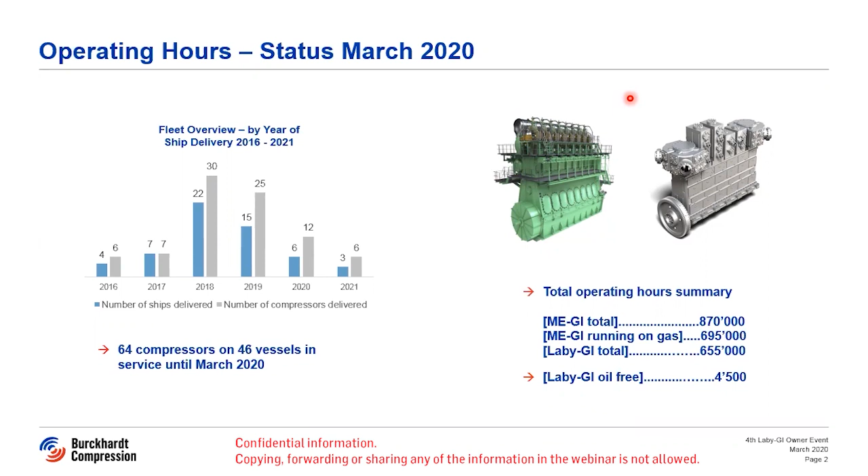ME-GI total running hours, as we forecasted, is 870,000, with almost 700,000 hours running on gas, where our Laby-GIs have shared 650,000 operating hours. And we are proud to announce that we have up to now 4,500 operating hours on the 1.5 LP250 running with the dry running sealing technology, oil-free. There will be more information in this presentation about that, and then later on by Laby-GI.

The table shows how many hours are accumulated per machine. It's very clear that the 5 LP250 single units are still the leading machines when it comes to running hours. There we have completed 6 two-and-a-half year inspections. All of those compressors have about 20,000 plus running hours, and I would say this will be a topic for the next event to share a little bit more insights of what we found when we did these two-and-a-half year services.

Nevertheless, also the other systems are ramping up hours, and there are more and more of these redundant LP190 and LP250 units now in service by end of March.

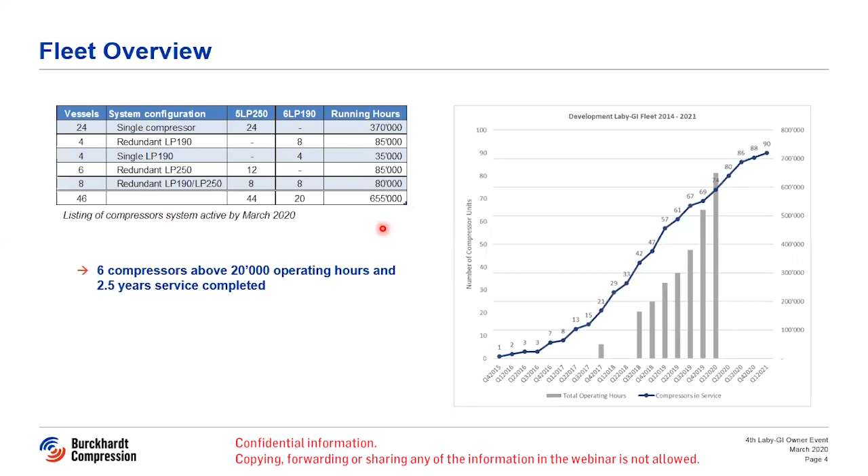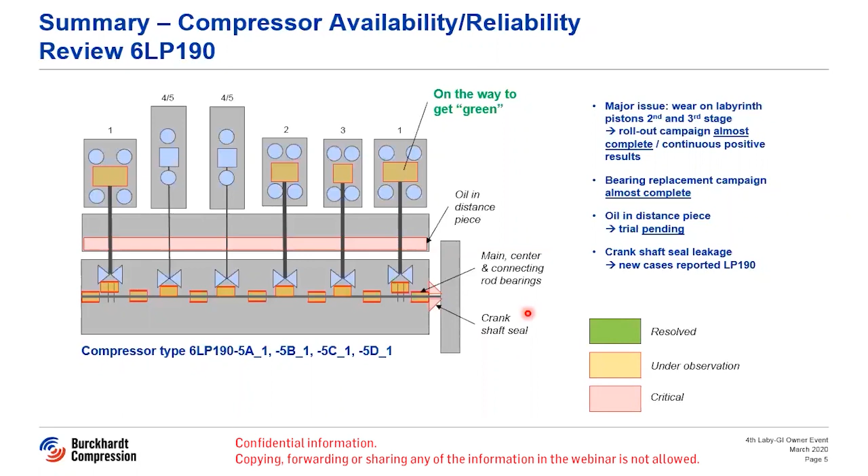However, we still keep an eye on the developments around oil in the distance piece. We still have to monitor the development of the new bearing materials, the galvanic materials, and the WM38 material, which is newly installed on the compressors. And unfortunately, we now also have cases reported from the LP190s with leaking crankshaft seals. This is an issue which has followed us on the LP250 for quite some time, and now it turns out we have a similar experience, unfortunately, with the LP190.

Reviewing the status of the upgrade campaign for the enlarged piston rod on the 6LP190, we are almost complete. At the moment only 4 compressor units remain which have to be upgraded, on 2 sailing vessels. It was planned that this upgrade would happen within the next few weeks.

But unfortunately, as you can imagine, due to the corona pandemic we have to postpone that, I would say to an unknown time, because at the moment it's not possible to get crews on board. It's already very difficult to manage logistics so that parts arrive at agents. So we have to shift that a bit, but positively said, there are only 4 units remaining out of these 25 compressors which had to be rebuilt. That is positive, we almost achieved the goal, and let's stay positive that it's just a matter of time until these 4 remaining units will be upgraded as well.

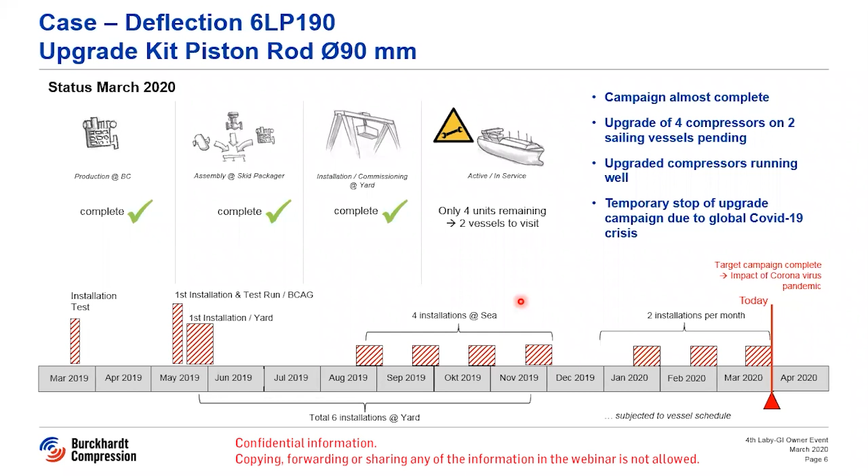Summarizing present service experience with the LP190: 12 compressors are now in operation with the D90 piston rod. The remaining compressors are still sitting at the yard waiting for commissioning.

Generally, the feedback we get from these machines is that they are running well. So far we get mainly positive feedback. It's good to hear that we get confirmed performance for the types 6LP190-5D and 5C, which have been intensively tested during gas trials at the yard.

Testing meant performance measurement where we compared required mass flow to actual measured mass flow and shaft power consumption, and it was positive for the specified operating cases. So with the measures taken, we can confirm that we are back on track with this compressor also when it comes to performance.

It's clear that we keep further development of any wear on the piston skirts and cylinder bores under observation, same with the main, center and connecting rod bearings. We agreed it should be monitored for at least 8,000 operating hours until we can give a green light that this upgrade campaign was finally successful.

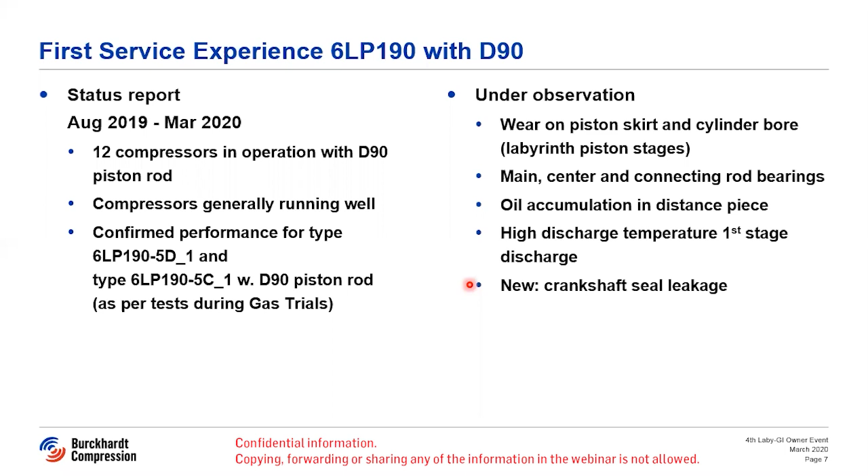The story behind this customer information is that we will have visual inspections carried out on this compressor after 1,000, 4,000 and 8,000 operating hours after the upgrade took place. We will inspect bearing conditions, distance piece conditions, crank gear conditions, and do a detailed clearance measurement on the labyrinth piston stages to get an idea of the status of the machine after the upgrade.

This was announced a bit too early in November because we realized there is a lack of spare parts, mainly gaskets, on board the concerned vessels. So now we will be ready: the parts are available, ship support will contact you, deliver these parts, and then you could start with this inspection campaign.

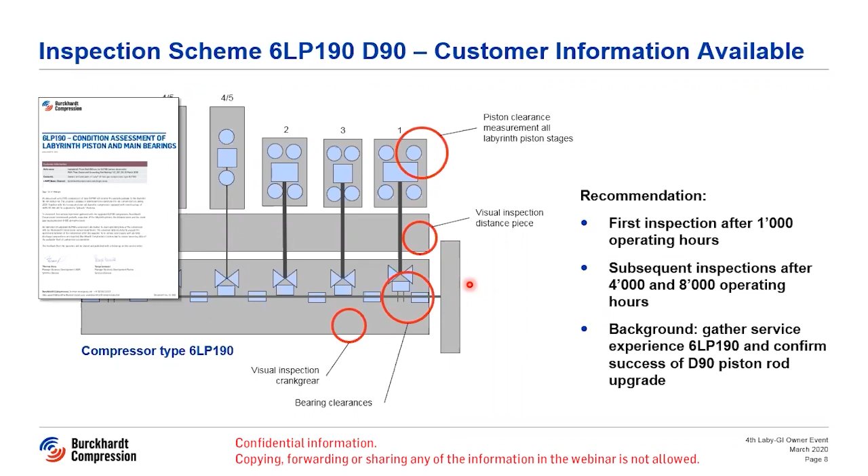A story which has been following us now for almost a year is the root cause analysis for the repeated bearing failures of compressor L0173.

This compressor, in the meantime, was tested about 22 times on our in-house test bed here in Winterthur. It was removed from the specific customer project and is now currently only acting as a test compressor. Many of the owners have been involved in the test runs done during the past month, and all classes have been involved, because we wanted to track down the root cause and make sure there is no correlation with compressors out in service.

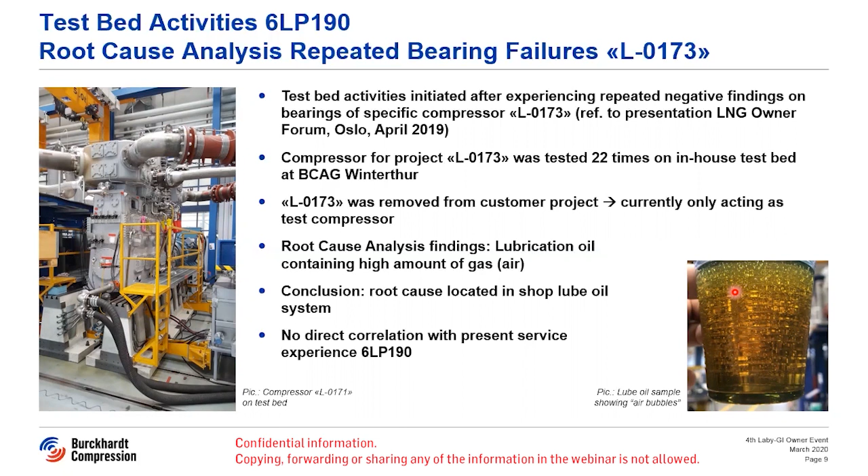So we figured out that the root cause is poor lubrication caused by entrainment of air in the shop lube oil system. Therefore, at the moment, we can rule out any direct correlation with present service experience on the 6LP190 compressors installed on ships in service. How did we conclude on that?

After first indications were present that there might be issues with the lubricating system, the shop lube oil system was modified, and some stilling tanks or stilling basins were installed. Here you can see in tank number 1, this is the oil coming out of the compressor during the test run, and I always say it looks like a fresh drafted pint of Guinness.

It definitely shows a lot of air being entrained in the oil. We can compare it to the condition of the oil in tank number 2, when it is already degassed. That led to the conclusion that the issue is not on the mechanical side of the compressor, but most likely the shop lube oil system having too many air bubbles in the oil, causing cavitation in the bearing area and leading to the experienced damages.

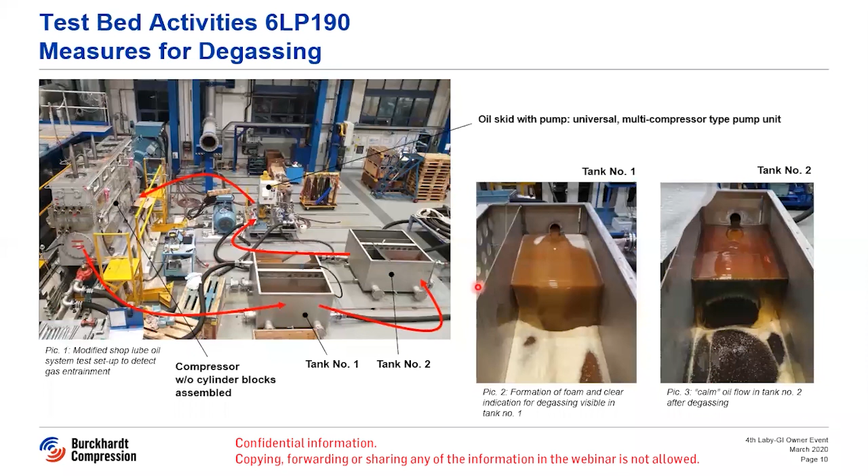How did it work when degassing measures took place? The system was modified so that this entrainment stops. On the left side you can see the typical result of a shop test with the original system, where we always had breakouts on the bearing edges as well as a lot of scratches. We did the same test run with a modified shop lube oil system, and the result was bearings coming out in perfect condition.

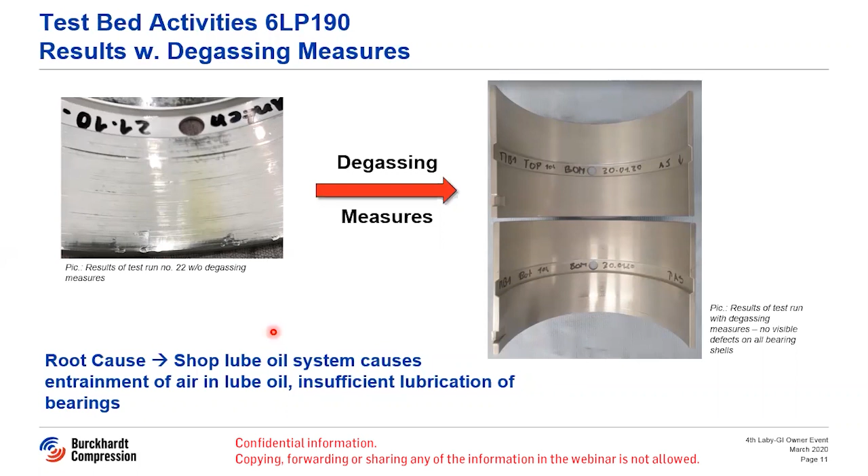So we closed this analysis here, at least in Winterthur, defining the shop lube oil system as the root cause. However, the question came up: how is the actual situation on board the vessel?

A number of test runs were conducted, and the finding was that with the actual project-specific lube oil system, we do not have issues with larger amounts of air or gas bubbles entrained in the system. Accordingly, the result of the test run was positive.

Maybe now someone might ask: why did this specifically happen to this compressor? Burckhardt has in the meantime delivered many of the 6LP 190 compressors, so why did it only happen on that one, not on others? This is a good question, and the answer is very simple.

Most of our 6LP 190 compressors have almost exclusively been tested in Korea, where we have a different shop lube oil system. The test bed in Winterthur is rather new, and L173 is just the second machine passing this test bed. That's why these bearing incidents did not come up earlier and were only stuck to this compressor.

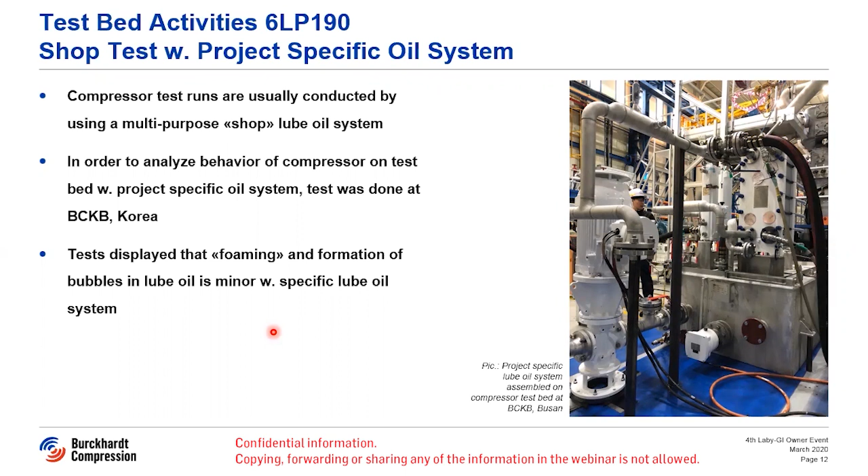Service experience LP250. Here we are still following up the trial with the new SIGRAFLEX gaskets on the valve covers to stop the gas leakages. There will be a detailed slide later on.

Oil in the distance piece is also an issue on the LP250. A slide will follow later.

Unfortunately, crankshaft seal, same as LP190, we have new cases reported. I think all the owners are now aware of this issue, and I hope we have a technical solution for that very soon. There is also a number of issues reported with axial bearings, which had to be replaced during the 2.5-year services. Usually this part should show a longer expected lifetime than just these 2.5 years, so this is also under investigation.

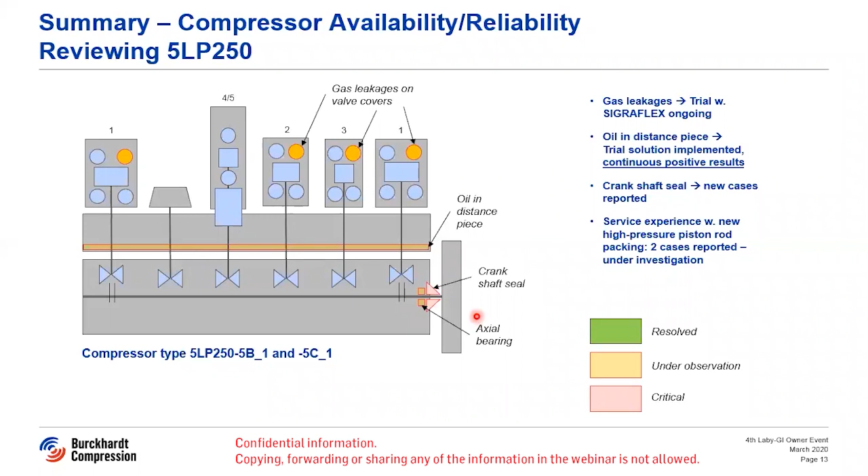You might remember the upgrade campaign on the high pressure piston rod packing for the LP250, started back in September 2018. I would say I will stop showing slides on this issue going forward, because now there are only 5 of a total of 34 compressors remaining where the old packing is still installed.

Some of these compressors will go to the 2.5-year service very soon, within the next few months, so it is obvious that this packing will also be replaced. For the remaining machine, I stopped tracking because the packing is on board — it's just a matter of time until, during a planned stop, we can replace this. So I would say we can close the chapter of this upgrade campaign, keeping in mind that almost all compressors now are equipped with these packings.

The new packing is installed on the majority of systems now and has accumulated quite significant running hours. For the time being, we can report that we have faced 2 issues with the new design of the piston rod packing. At least one time, we consider it to be a secondary harm coming from the outside — we found some metallic particles in the compression chamber, and they entered the packing, leading to excessive wear.

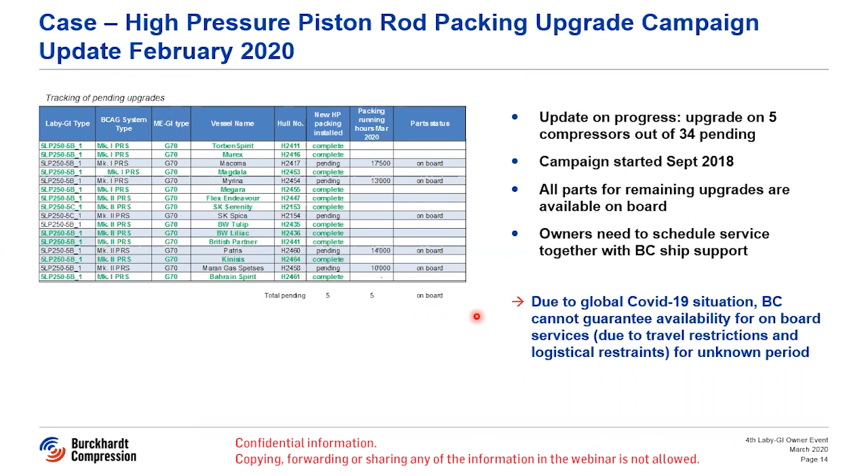Oil accumulation in distance piece, an update here. It should be March 2020, not August 2019 - sorry, that's a typo, old slide.

We have already announced that we have positive experience with a setup running on the non-lube trial compressor, which is actually a quite simple modification, shown here on the right.

The upgrade on the machine just consists of enlarged siphons. These siphons are installed on the guide bearings, which are installed here, guiding the piston rod on the labyrinth piston stages.

So with the new siphon design and an improved oil scraper design on the high pressure stage, we have made positive results now on the non-lube trial compressor. And at least one or two more compressors are selected to get this solution installed.

This material will be installed on compressors during the 2.5-year service. We know these machines had significant problems with oil accumulation in the distance piece during the past almost 20,000 running hours, so we hope to see a very fast result of this installation.

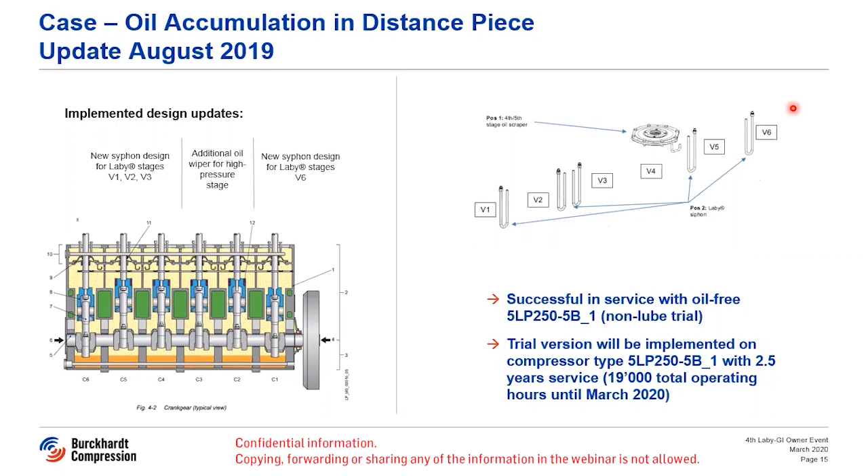And if positive results are repeated, then we would roll out the solution, of course, also on other machines, including the 6LP190, because this solution we consider independent of the type of machine.

How does it look on the oil-free compressor trial? When we have a look into the distance piece after 4,000 operating hours, we found it in almost perfect condition.

Those pictures are real, taken by the crew. They didn't clean the distance pieces before taking the pictures. So we see there is no accumulation of oil, neither in the labyrinth piston stages nor in the high pressure stages.

This is, of course, because there is firstly no oil coming upstairs from cylinder lubrication, which is one part of the problem, but the majority of oil we know comes from the crank gear - it's oil mist from the lubrication which is pushed up into the distance piece.

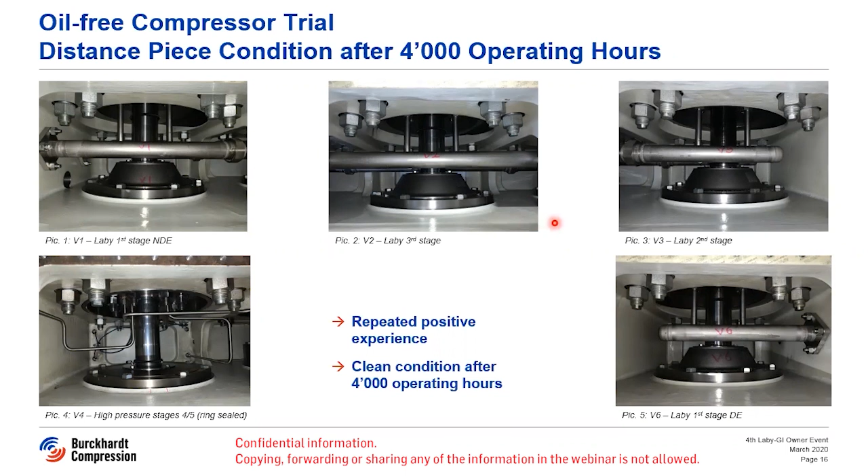With the measures shown on the slide earlier, we are positive that this now can be stopped, and we hope to continue having such a condition in the distance piece for the next 4,000 operating hours. I will keep you further informed about the development during the next events.

Coming to the status of the oil-free compressor trial in general, where are we today? We have reached our 4,000 hours operating target by end of February.

We have dispatched our service engineer on board, and during a ballast voyage these installed sealing elements have been replaced. The parts are currently on the way back to our offices.

But what we can say for the time being, because we already received measuring reports and pictures from on board, the parts looked very good, very promising. Lucy Valère will later show us more details about that in the later presentation.

So the machine was equipped with new parts by beginning of March and started up on the 6th of March for a second trial period. The target now, after this successful 4,000 operating hours, is to go at least for 8,000 operating hours, meaning we'll have new results in about a year from now, maybe around April up to June 2021, depending on the number of voyages concluded and the utilization of the compressor.

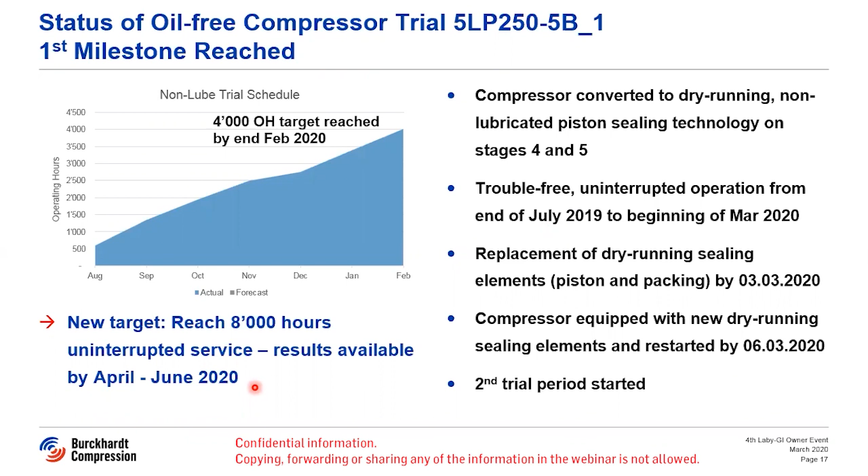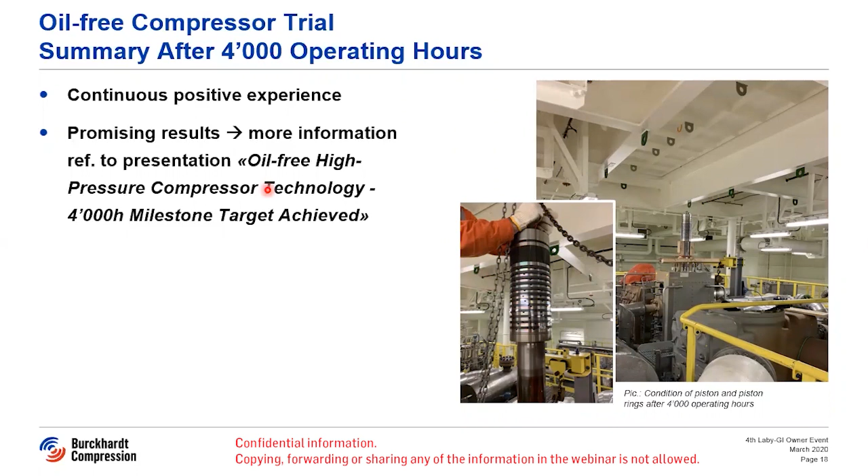So what does this mean in general when we look at the schedule of non-lube technology? We have achieved now our 4,000 hours target. We always said when we have this target achieved, we would be ready for rollout of this technology for new buildings, though this will still be accompanied by further testing.

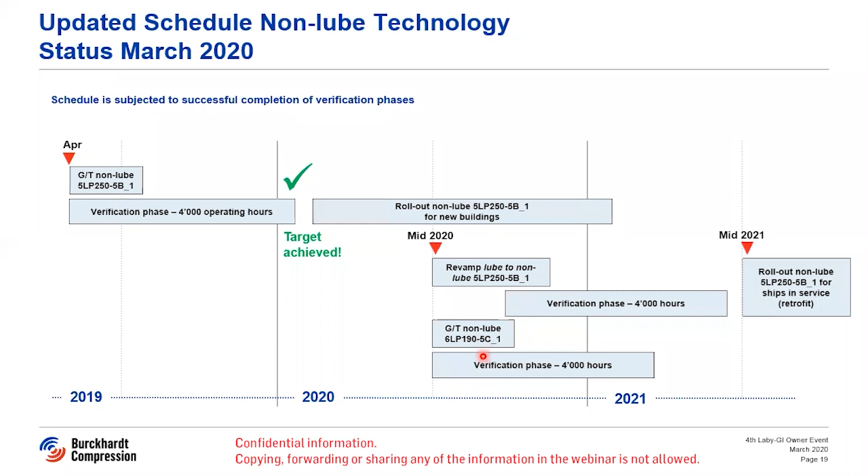However, technology is available now, and we will also start focusing on having a 6LP190 retrofitted with dry running technology. Our engineering is almost finished here, and we expect that, with the help of a voluntary owner willing to participate in this trial, we could start around summer 2020 during a gas trial, and then continue with a 4,000 hours verification phase.

An interesting learning during this first non-lube trial, this 4,000-hour non-lube trial, was that after 2,300 operating hours, we got informed that the crew notices a differential pressure high alarm on the 5th stage coalescing filter, which was still installed. Remember, this filter is usually required to take out the cylinder lubricating oil from the gas before we enter the PRS. However, in this case, there was no cylinder lubricating oil present at all.

We did a microscopic and thermal analysis of the material found. It was a mixture of a little bit of everything, a lot of fabric-looking particles. The thermal analysis of the material displayed that it's not material originated from our sealing elements, because that would be mainly PEEK and such compounds. It was also not really originated from metallic particles from our system, be it from the labyrinth piston skirts or from the cylinder blocks. So it is not originated from the compressor.

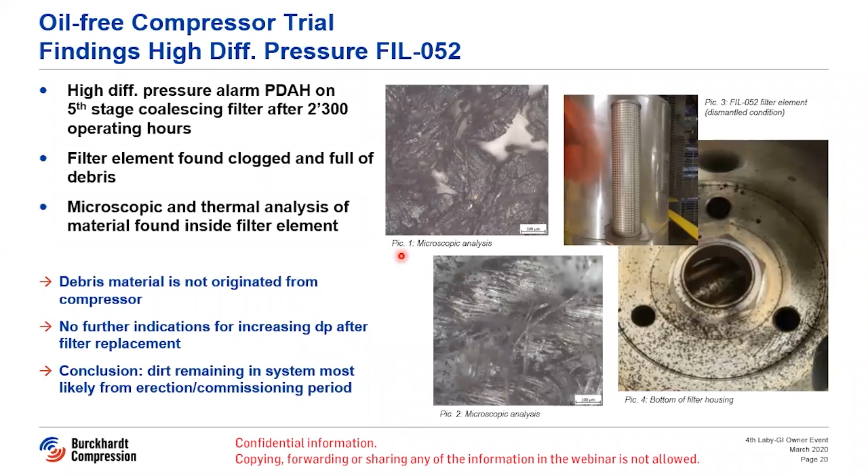A technical update, interesting especially for those of you who have ordered compressors, both LP190s and LP250s, in the years 2016 and earlier. There have been partially cases reported with systems having difficulties when the compressors are operating in a side stream mode, where a lot of gas is being discharged to the gensets and to the GCU. I'm talking about gas flows in the range of 3 tons and above.

How to tackle that? Later systems have the pressure transmitter installed downstream of the check valve, so control is arranged in a way that differential pressure is compensated. For the concerned systems, we have made trials in service with a new type of non-return valve with a very low differential pressure characteristic. It's made by RITAG, a German brand. All the tests have concluded very positively.

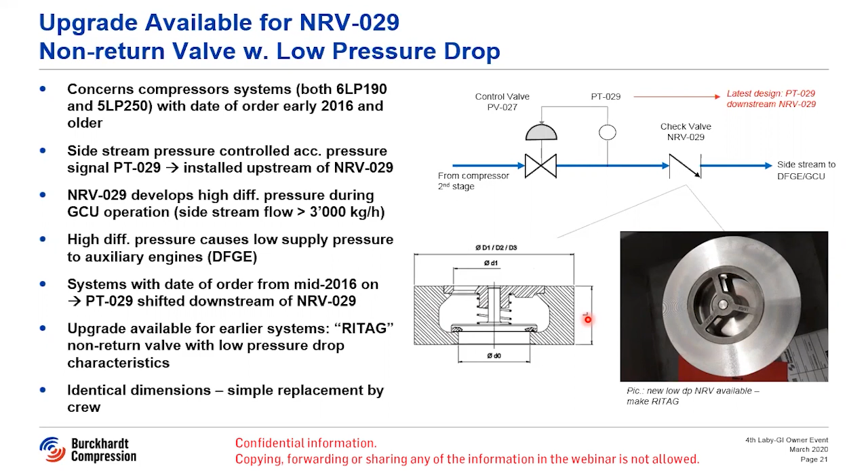Gas leakage on the compressor valve covers - an update on where we are today. Until today, we have supplied gaskets of the new material, this SIGRAFLEX material, to 13 vessels, though we don't know in detail if it is installed on all 13 vessels. The general feedback we have received is positive. However, I have to mention that our ship support asked me to please remind all owners who are participating in these trials to give us direct feedback.

With the SIGRAFLEX gaskets, you have been provided a log sheet for measuring the LEL readings with the gas detector. On the machine, there is also a procedure for how to do the measurement. In order to successfully close this campaign and make it official, we would be happy to receive these LEL readings from all trial candidates within the next few weeks, so we can finally close this chapter. We have received a number of readings from some of you already. Thank you to the owners who have submitted.

So generally, the experience with the SIGRAFLEX gaskets is still positive.

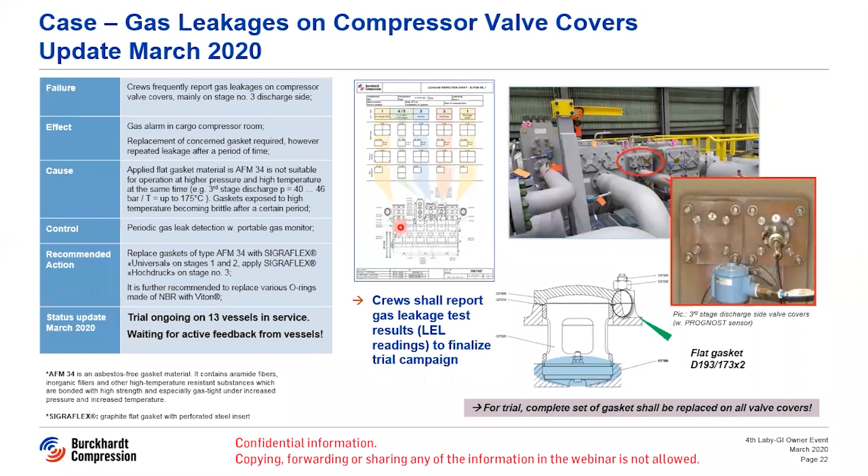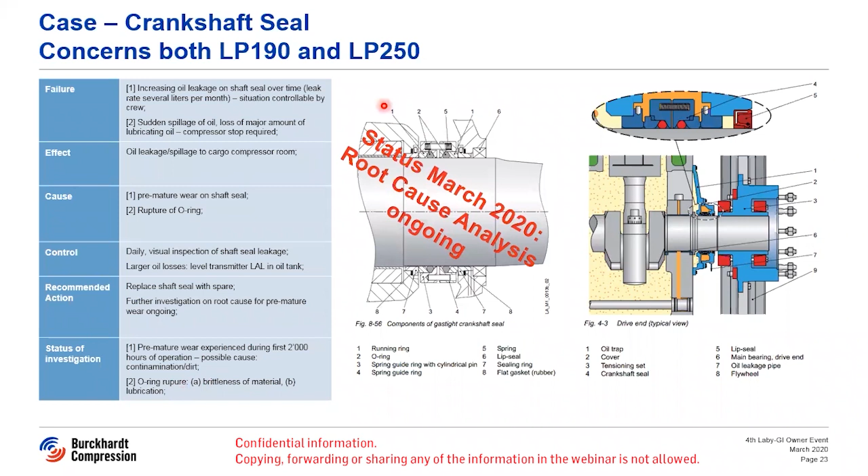That was the service experience. Now I would quickly show you a few more slides on what is going on in the engineering offices, the R&D offices of Burckhardt, when it comes to new developments.

We announced quite some time ago that we are working on a successor of the Mark II Laby-GI LP250, a model we call Mark III. In detail, it's the LP250V. It's a compressor having a stroke of 230 millimeters with an average piston speed of 3.9 meters per second. Just to compare, the LP250 Mark II operates at an average piston speed of 4.2 meters per second. Why is this important?

Because this product will be a completely dry running, oil-free, sealed compressor. And Lucy will explain later that average piston speed is essential to extend the lifetime of the sealing elements into areas required by the owners. We have this compressor available both as 4 LP250 and 5 LP250. Again, in the crank gear, we have the well-known features: fully balanced and gas tight, so it's zero leak gas, as we know it from existing Laby-GIs.

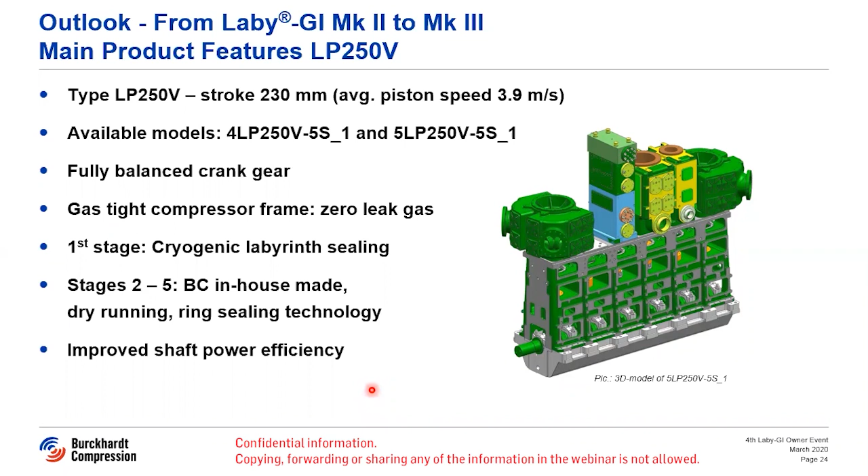I think at a later stage of this development project, we will also put some numbers on the table. What kind of improvements have been included in the design?

What can you expect? There are quite some changes when we look at the cylinder models, for example. We have replaced the stub end connection currently in service on the compressors, because some of you are aware there have been issues reported with gas leakages on these connections. So the new LP250 Mark III will have exclusively gas connections according to ASME standard, very solid flanged connections, no longer the traditional stub ends. We have also shifted the piping connections generally away from the valve covers, making them more easily accessible for valve maintenance, which I think will be very well appreciated, especially by the crews. And the new cylinder designs will no longer require cooling on the cylinder covers, so there will be less piping to remove, install, and remove again during service activities.

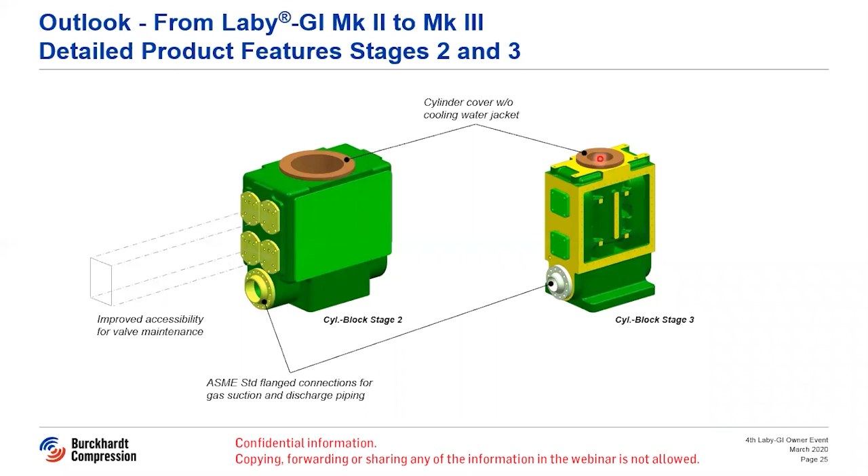So by compressing the gas, we can then let that act as 4th stage and 5th stage. This is the present technology, which you know very well. Future technology will be looking like that.

We will apply the step piston technology. That is not a new development. It has existed on compressors for more than 100 years. Since reciprocating compressors have existed, there have been dual piston concepts as well as step piston concepts. Each of them have pros and cons.

We want to apply the step piston concept on the dry running compressor due to its advantages, especially when it comes to the arrangement of the high pressure packing, because with this arrangement we have the situation turned upside down. The 5th stage is now on top, 4th stage is now on bottom, meaning we have a pressure range of around 45 to 100 bar discharge pressure on the 4th stage acting on the compressor packing, whereas on the existing design, pressures up to 300 bars act on the packing. So we consider that to be an enabler for longer lasting packing, especially with dry running, to have a longer lifetime of the sealing elements installed.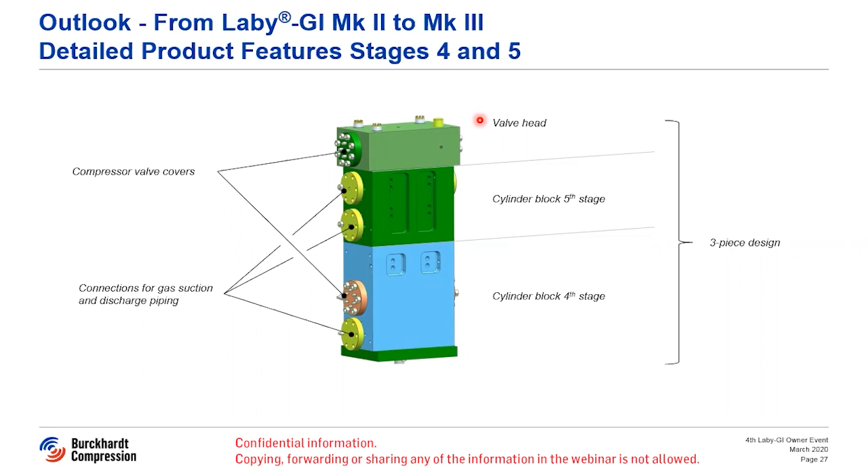Now, the question already came up during recent owner forums when we compare these two cylinder designs: what is the height requirement above the compressor? Because there we have limited space available in the deck house. I have comparable numbers here. The existing 5LP 250 requires a height of 5.65 meters to remove the piston from the high pressure cylinder. With the new arrangement, we will grow by 150 millimeters, which I consider negligible.

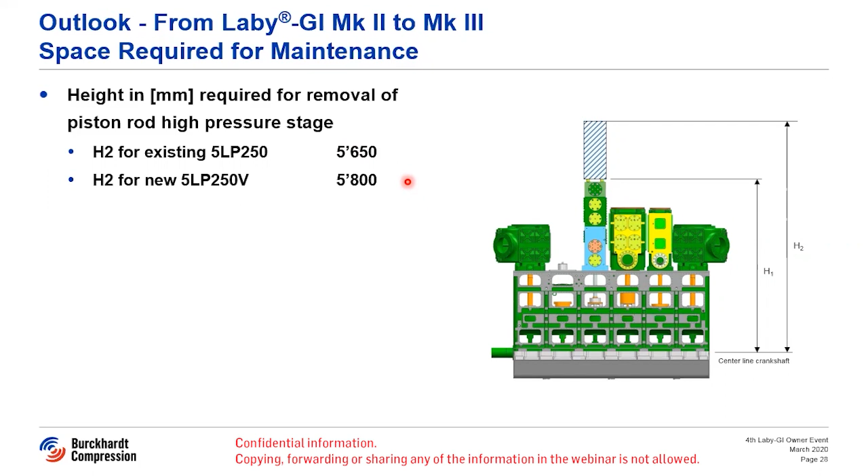To dismantle that, in the first step, the valve head will have to be removed. Together with the valve head, the liner of stage number 5 will be automatically dismantled. We can pull the piston from stage number 5, which is connected in this area. By disconnecting or loosening the bolted connection here, first the stage number 5 piston can be removed, then the stage number 4 piston can be removed, and so all the parts are out. The packing will still be removed through the distance piece, and new sealing elements can then be installed.

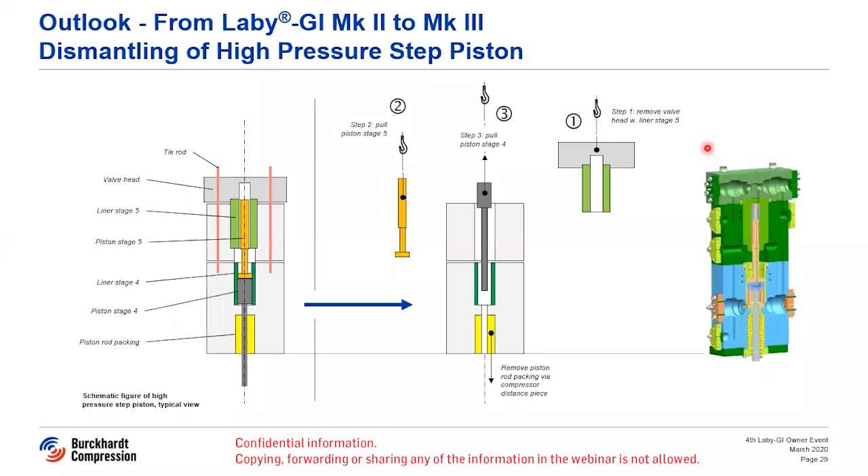I think that answers the question of the people who addressed that to me back in Trieste. At that time, unfortunately, I did not have the detailed engineering drawings available yet. If there are further questions, don't hesitate to ask later on.

For the 4LP250, the new compressor type introduced mainly as a replacement of the 6LP190, we have now sold our first unit. It will be delivered to the yard in April 2021. For the LP250, I think it's important to remind you again that interesting especially is the spare parts interchangeability with the 5LP250 if installed in parallel.

All the green marked areas indicate that the parts are interchangeable. So in terms of keeping spare parts on board, all the compressor valves are identical on all the stages. Piston rod, all stages are identical. This includes as well the piston rod glands, labyrinth stage guide bearings, oil scrapers, high pressure piston rod packings, and of course the complete parts in the compressor crank gear.

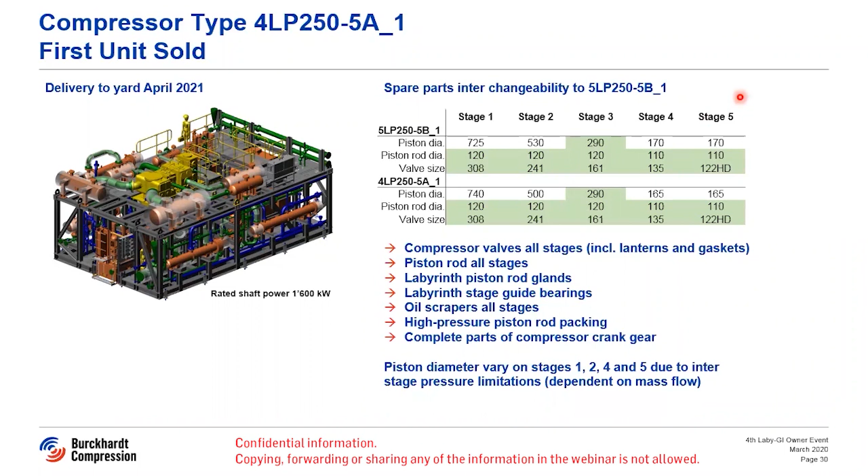There are still some differences, as you can see here, due to the reduced mass flow of the 4LP250 and to different interstage pressures. The piston diameters themselves still vary on stages 1, 2, 4, and 5. However, I would consider that minor if we keep in mind that with the 6LP190 we had completely different requirements for spares.

I think I'm still within time, almost, yeah. One minute over.

I quickly wrap that up before you can address your questions.

Summarizing, we made good progress on the LP190 upgrade campaign, now almost complete. We have had a positive service experience since then with the LP190s. We also have very good, important results with our non-lube compressor trial. We have achieved this first milestone, the 4,000 hours.

We are the first ones doing so. There is no other compressor maker yet having achieved such a result with 300 bars and methane in a maritime environment. We have closed the 5LP 250 packing replacement campaign after 2 years.

It was a tough time, I have to say. Definitely we did not consider that this would take 2 years, but with the learnings of this campaign, maybe next time we can speed up a bit.

The number of issues remaining with the LP190 and 250 is still not satisfying, I think. We are all aware of that. There is still a lot of homework for Burckhardt to do, and doing this homework right now with you as owners and your crews having difficulties on board, it's very hard for us. We cannot dispatch crews now.

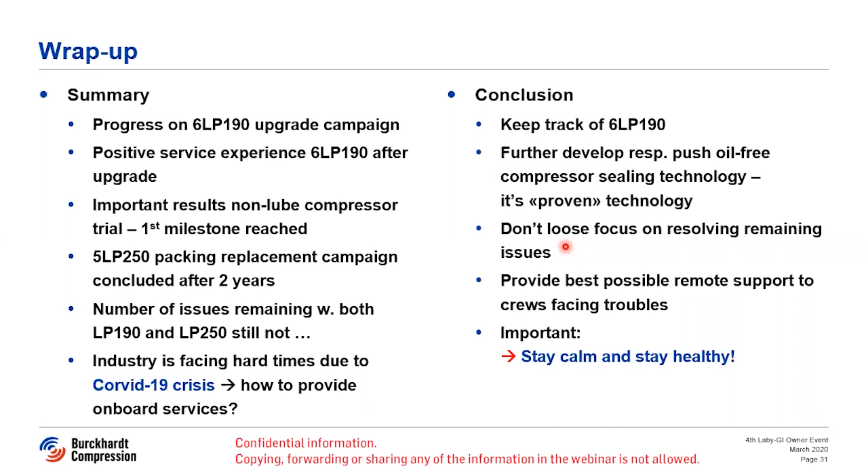It's not something not feasible. It's real. We will not lose focus on resolving the remaining issues, and for the time being we try, of course, to provide the best possible remote support to you. And all I can say now is let's stay calm and stay healthy. I think this is the most important thing we can do.

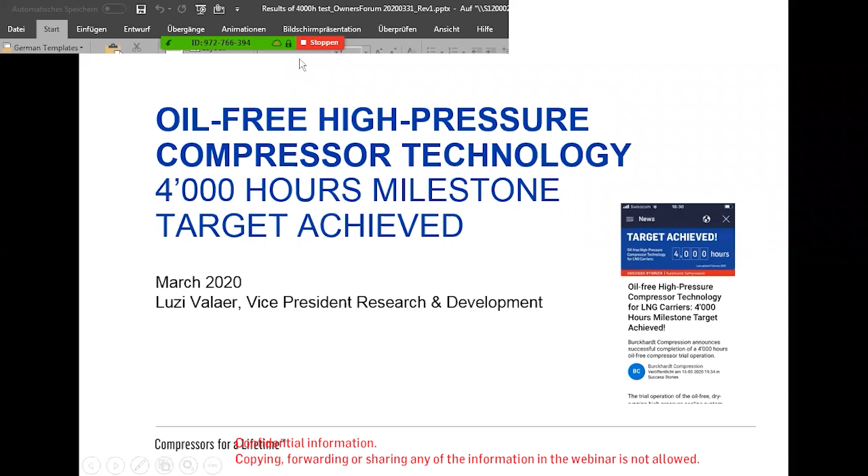Sharing the developments around dry running sealing technology. I just opened the presentation, and here we go. Why is my computer not showing that properly? Huh, why do we see that? Okay, now it looks much better. So by keeping social distance, I will move from my chair.

Okay, good morning, everybody. It's really a pity I cannot see you. And it's also a pity that you cannot see me, because after many days of home office, I shaved today. But let's do the best of the situation, and I will give this talk just as a webinar.

It's about the oil-free test that we have performed on a running vessel. The ones of you that already have our app are aware of the results, so it was published, as you can see here. Just so you can see here the page of our application.

I will give you some more insights about, first of all, dry running technology, because we believe that this will be the technology for the future for high pressure fuel gas compressors for LNG carriers. So that's why we think it's worth spending a little time on it.

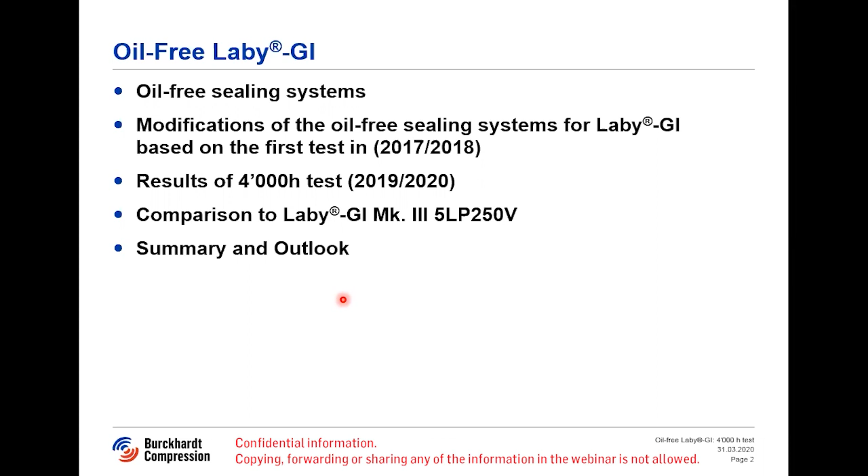Okay, about the oil-free technology. It's somehow always a little bit of a miracle how you can just remove the oil from a compressor and it still works. But of course, there is a lot of work behind it, and I will just highlight the main issues, what has to be considered to make it work.

First of all, we need the right ring material, because this material has to be self-lubricated, and it has to withstand very high pressures, and it should generate very low heat of friction. So it's a very specific requirement for a material that cannot be found on the market. That's why we develop our own material. We have a laboratory, we have test compressors, and we have very experienced people that have developed these kinds of materials for more than 20 years. We are very successful, and we have our own portfolio of materials, the persistent materials, that are all according to our own recipe, and most of them are produced in-house here in Winterthur, and we also have the quality under control. I think this is a very important cornerstone of this technology.

Next point is tribology. So these materials need the right friction partner, and as a first idea, you would think you have to have a very well-polished surface, but this is not true. As indicated here, you need a specific roughness to make sure that some of the material of the ring gets embedded here in these grooves of the counterbody material. So you need very specific grinding of this counterbody. The grinding is one thing, but then you want this structure to be present for a very long time, and that's why it needed a lot of investigation and research to determine the right counterbody.

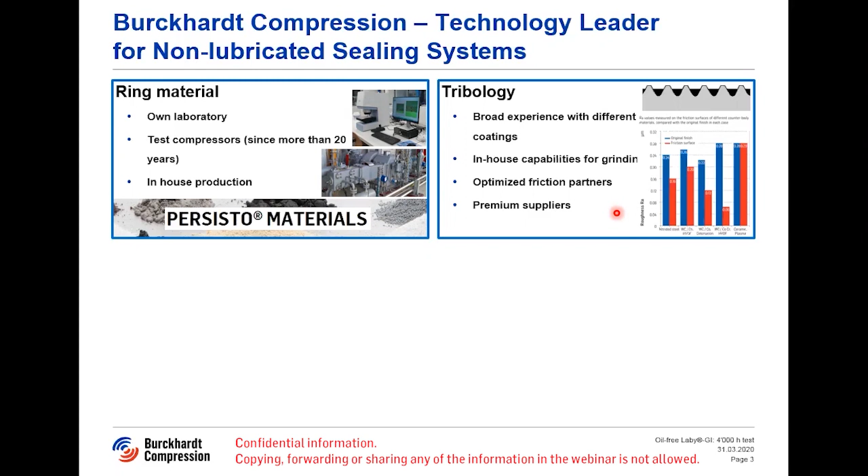You can see here results of different coatings of the piston rod and the liner. We have invested a lot to know the advantages and disadvantages of the different coatings available. We work with some suppliers, but also with in-house capabilities, and this is an advantage we have because we really build the ring material and we also build the compressor, so we can partner these two topics together.

Next point are the sealing elements itself. We need rings that are sealing very well, so they have to be tight, they have to be strong, and they need a lot of wear compensation, because the wear will always be slightly bigger than in a lubricated machine. So we have to compensate this wear to make sure that we have a long-lasting sealing system.

We also have our own ring types. We have developed them since many years and are constantly improving them. And with this, we can say we are a market leader for the ring designs as well.

And in the end, you have to be able to configure a system out of these elements. Here you can see a very famous plot that we always show. You can see here the one rotation of the compressor. On this side you can see the different sealing elements, and this is the pressure. So during one rotation, you start here, you compress the gas, and you decompress it. With sealing element 1, you would see the pressure in the compression chamber.

Typically, the suction pressure is sealed by only one sealing ring, because the higher the pressure difference over a sealing ring, the higher the sealing efficiency is. So usually only one seals the static pressure, but the dynamic pressure, which in the case of Laby-GI is a 200 bar pressure difference, is changing 10 times per second roughly.

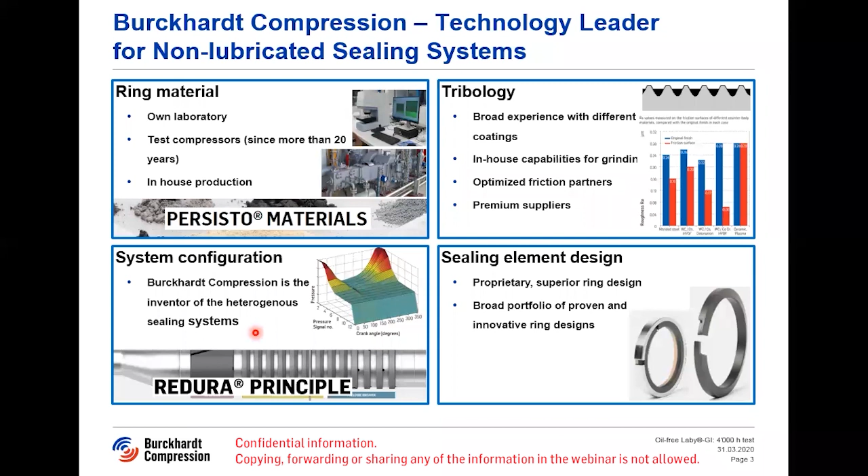This is like a hammer drill for these sealing elements. So you have to protect them and you have to distribute the pressure load over several rings. That's the main story about the system configuration. We have to make sure that the dynamic pressure is distributed. If not, a single ring would break very easily.

So this brings me to the learnings from our first test. We had malfunctions in the oil scrapers. This is something that is easy to fix, but unluckily this was the main problem that we encountered, because nobody was thinking about draining the distance piece, and the oil accumulating in the distance piece in the end killed our dry running system, because as we have stated before, oil in a non-lubricated sealing system is harming the performance and the rings.

Then we had a very high pressure difference over some of the rings that were not supposed to have such a high pressure difference. That's exactly what I explained before. We have to make sure that the dynamic pressure is distributed over several rings. This was not the case in the packing that we have installed.

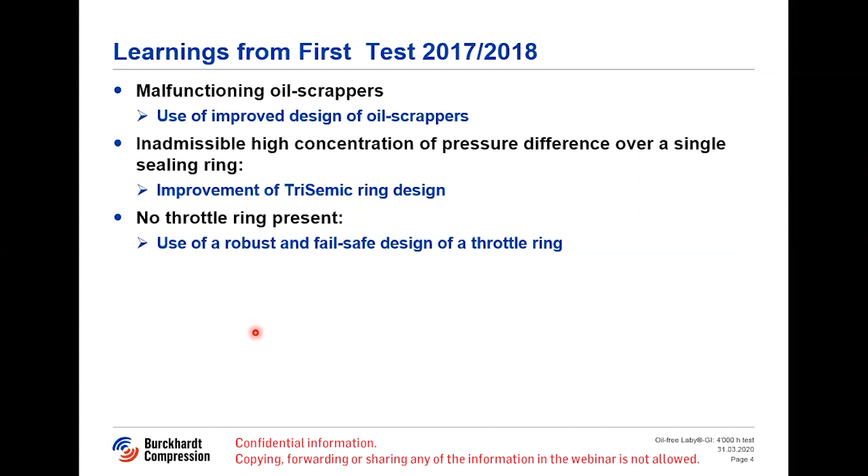Then we realized that a throttle ring - it's called throttle ring, but in the end what we need is a protection ring - was not installed. We realized it's very important to make sure that if some rings break, and in a dry running packing some rings always break because the load is really high, it's a natural way of wear for some of these rings that they break in the end. But we have to make sure that the debris of these rings don't end up in the compressor valves. So we need a ring which was not installed.

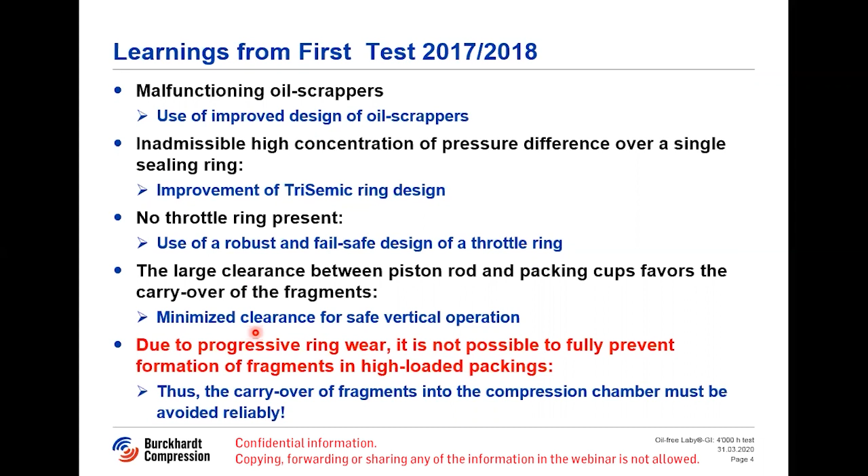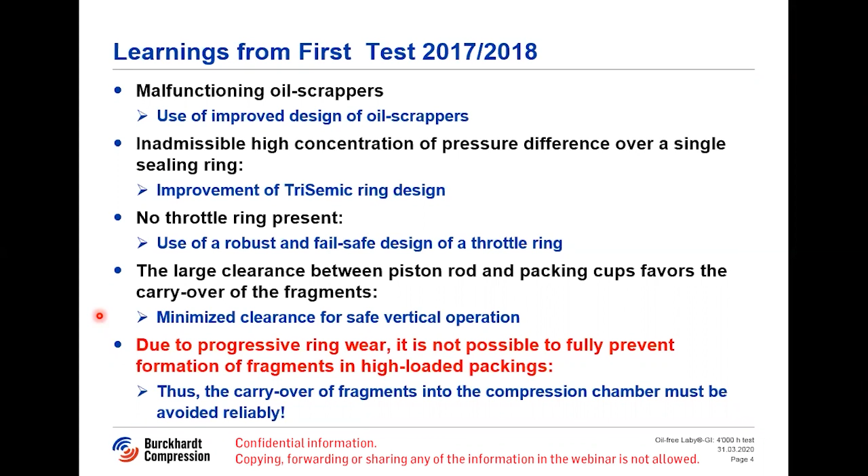Then we also had a very large clearance between the piston rod and the packing cups. This also allowed these debris to go into the compression chamber and end up in the valves. So we realized that this is a very important property of a pressure breaker ring, that we just have a ring that separates the compression chamber from the packing, where we can have debris that don't do any harm, but we have to make sure they don't end up in the compressor valves.

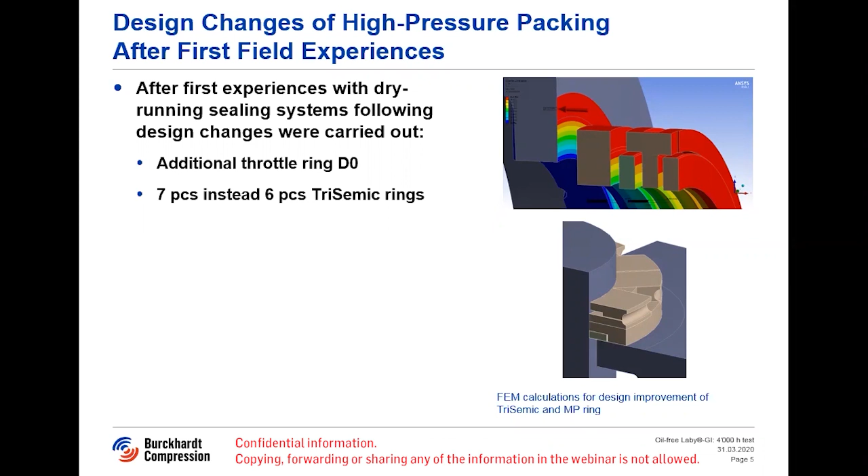So what have we changed? We have installed this ring. I will show a slide about this ring because it's also important for the lubricated packing as well. We have increased the number of TriSemic rings, which are the real pressure breaker rings, so the ones that distribute the dynamic pressure between each other.

We have increased the number of multi-piece rings. These are the rings that really seal. And we have improved the rings itself by applying finite element analysis, also to make sure that we have made the scaling right, because we develop usually these rings in smaller sizes on our test compressors. For the big piston rod on the 5LP 250, we had to scale it up properly. So we improved that a little bit, and same goes for the MP ring.

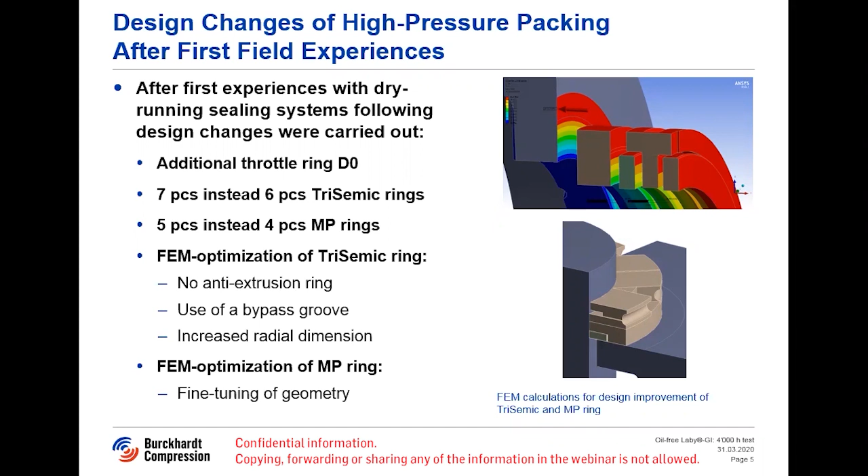Coming back to the throttle ring, this is a new development actually made for this dry running sealing system, but now applied also for the lubricated version. It's protecting the compression chamber from all kinds of debris coming from the packing.

It looks like a ring from the labyrinth sealing system. It's an endless ring without a tensioning device, because we realized that in some instances this spring on the pressure breaker was breaking, and the pressure breaker itself was the source of a problem. So we eliminated the spring, and it's a solid ring now.

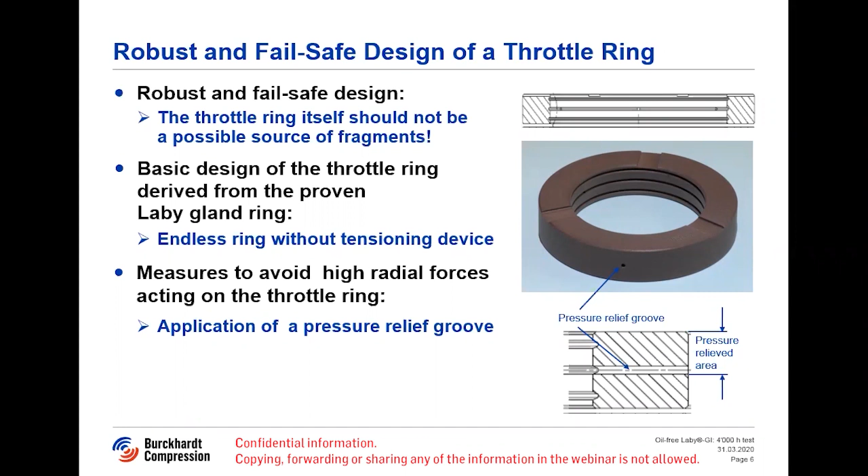It has some grooves to improve the sealing efficiency, and it also has some bores to reduce the pressure in radial direction. This is important so that in case the ring heats up, it does not lose stability and collapse over the piston rod.

So we now have a lot of experience with this ring, because it's installed in all the packings that we use, also in the lubricated ones. We have very good experience with this ring, and it really does the work, protecting the compressor valves from any debris from the packing.

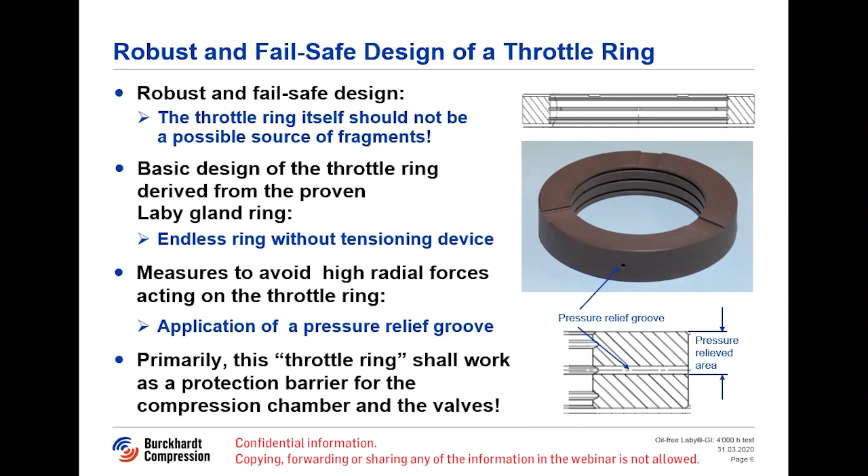Coming to the TriSemic rings, I said we had an issue that the distribution of the pressure was not good or sufficient to give them a chance to survive. So they had too much dynamic pressure.

You can see here a picture from our test compressor, at the very beginning when the rings are new. You can see here the 100 bar suction pressure and the 200 bar discharge pressure on our test compressor. You can see that only one ring was sealing the whole dynamic pressure — every line is the pressure behind a ring.

After about 100 hours, we could see a very nice pressure distribution, which is exactly the state we want to achieve. But we had not taken into consideration the first 100 hours where the rings have to run in, and during this time some of them seal too well, so they seal completely and take over the whole dynamic pressure. This was the case in our first trial, and it led to failure of the rings.

We improved the rings by applying a bypass channel, which basically means we have already manufactured them in a run-in state. So you can see that from the very beginning, we have a very nice pressure distribution. And also after 100 hours, this pressure distribution remains constant, helping to protect the rings and allowing them to achieve a very high lifetime.

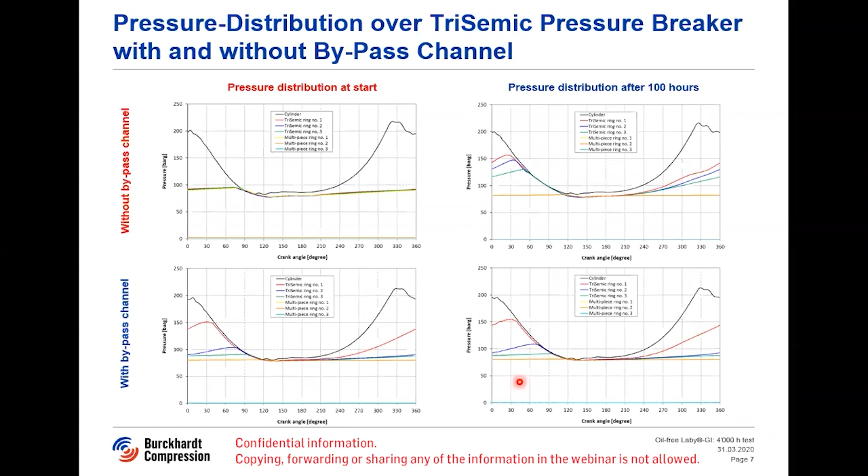This was implemented, and as we said before, in July 2019 we started our test on a running vessel just after gas trial, so it was a clean vessel. It was a very fortunate situation that we did not have to clean all the oil before installing it, and it ran flawless for more than 4,000 hours.

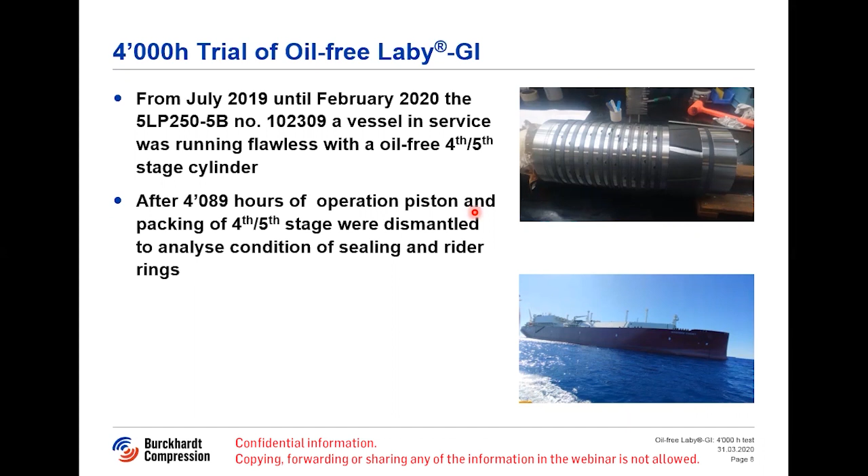At almost 4,100 hours, we dismantled the sealing systems for inspection. This was pre-agreed, that we would take it out after 4,000 hours because we wanted to know the state after 4,000 hours, and we didn't want to risk something damaging the rings so that we couldn't learn from this test. So we took it out after 4,000 hours and replaced the sealing and rider rings.

Now, for about 500 hours, the compressor has been up and running again. We are very happy that during this whole 4,000 hours, the compressor was always available — we did not have a single incident with the dry running sealing technology.

We could also show that the oil does not cause any contamination, which could be seen in the very good performance of the overall system.

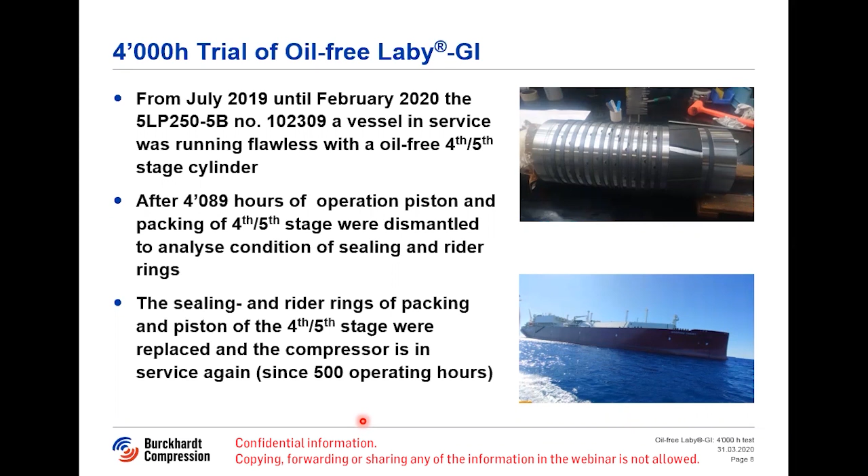We installed additional monitoring of this packing because, first of all, it's a test, and second, we want to be able to predict the condition of the packing to make sure we can replace the rings in a period where it's no problem.

In this specific case, it's a vessel with a redundant system, so on a ballast voyage it would be no problem to replace the rings, while on a laden voyage it might cause some problems. That's why we really want to know if the system is fit for the next laden voyage, and with this additional monitoring, I think we have a very valuable insight into the packing.

What we have been looking at is the pressure inside the packing. For this, you can see here a sketch of the packing. Between the TriSemic rings — the pressure breaker rings, which should take the dynamic pressure — and the real sealing rings, the MP rings, we have a pressure sensor.

Additionally, we have monitored the piston rod temperature, and this is a very valuable indication to see if we have thermal collapse in the packing. This would be a very early indicator that something really bad is going on. I don't think this is needed to predict the condition - it was more a safety measure for this specific trial.

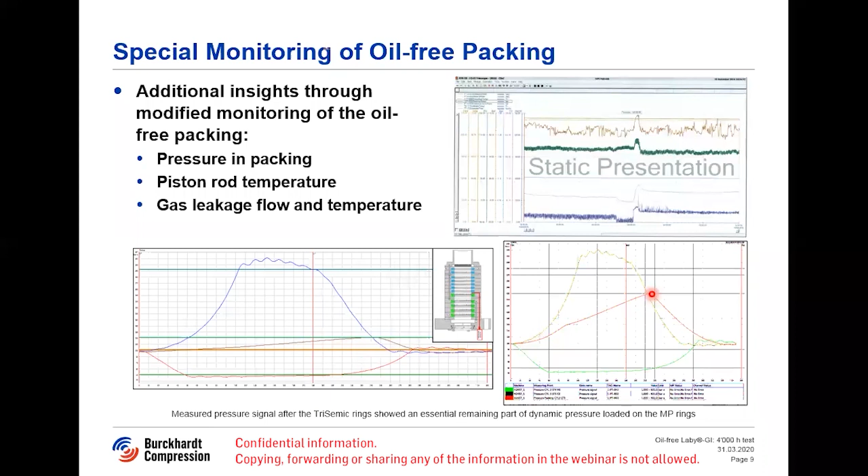We can see that the pressure, the dynamic pressure reaching the MP rings, was very low. We could see that with some wear in the packing, this value increased and increased. Still, on the right-hand side, you can see that the value of the dynamic pressure is relatively high, but the gradient - how it increases, the steepness - is reduced a lot compared to the pressure in the compression chamber. This reduced gradient also helps a lot for the MP rings to survive, and this is also something we could show in the result of this test.

Looking at the inspection of the sealing elements, you can see here a sketch of the piston. Here is the 5th stage compression chamber, here the 4th stage, and you can see the rings numbered going from high pressure to low pressure. We have ring number 1 till ring number 6 - these are retained piston rings, meaning they don't have wear compensation, so they will not wear after a short period of running in, but they are the pressure breakers on the piston. Then we have ring number 7 till number 12, which are traditional sealing rings supported by an anti-extrusion ring, plus one additional sealing ring for the 4th stage and the rider band.

Looking first at the retained rings, there was no fracture - these are, as I said, the pressure breakers, so they see the whole dynamic pressure, which is usually a threat that they could break, but none of them was broken. There was no thermal damage either, which could usually happen during running in when they still have some wear compensation and get too hot, but this was not the case.

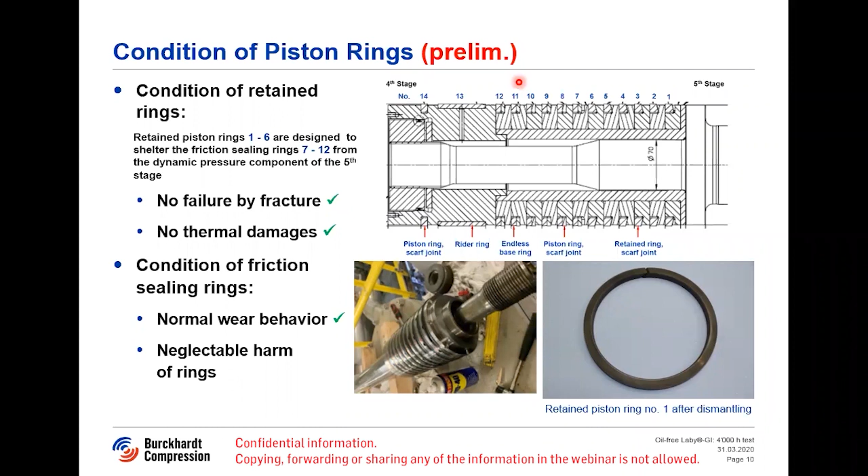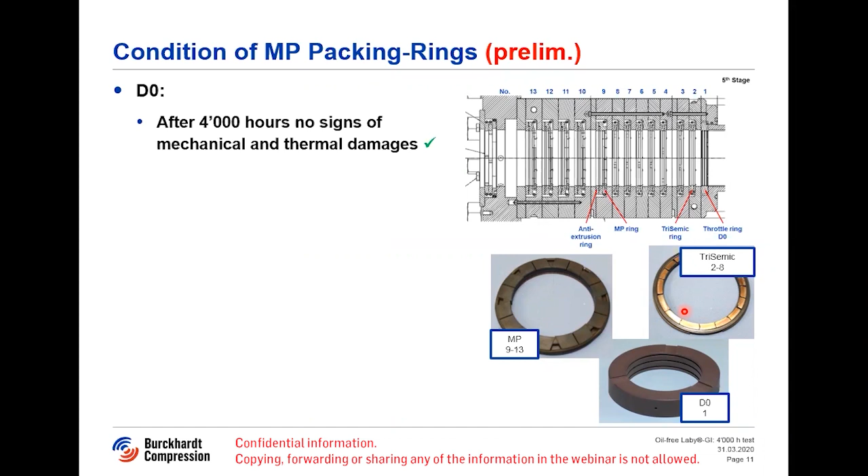Here are the pictures of the different rings, and here the trisemic ring you already see broken. This is typically how they break - they still remain in function, but somehow they seal less when they break, and this also happened here. But first to the D0, the protection ring - this one looked like new, and it was obviously doing the job because none of the debris from this trisemic ring could enter the compression chamber.

The trisemic rings itself have suffered a little bit - 2 of them were fractured heavily.

2 of them were in reasonable condition, and another 3 were in very good condition. In the end, this is where we see some improvement possibilities, but nevertheless, they have done their job for the 4,000 hours and protected the multi-piece rings, because all of the rings were in very good condition.

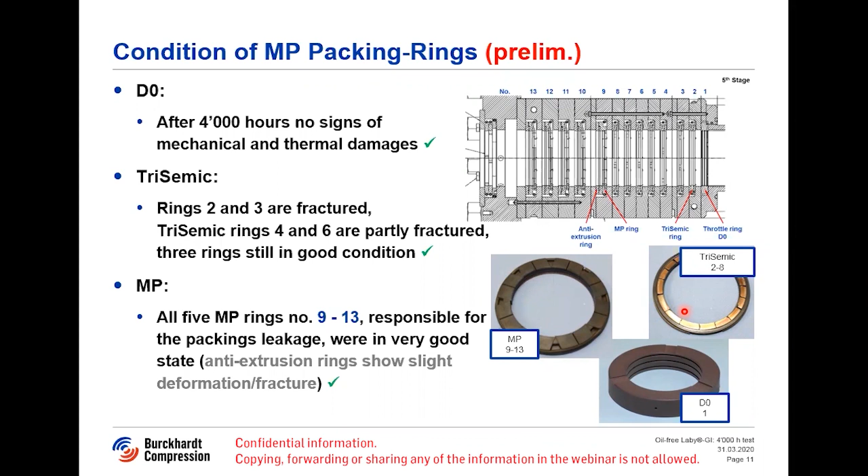The wear was as expected. It seems to be very linear wear, which also allows us to estimate how long the rings could survive under these conditions. We also had some very slight deformation, which might lead to an improvement of the material itself, but this was in no way interfering with the operation of the compressor.

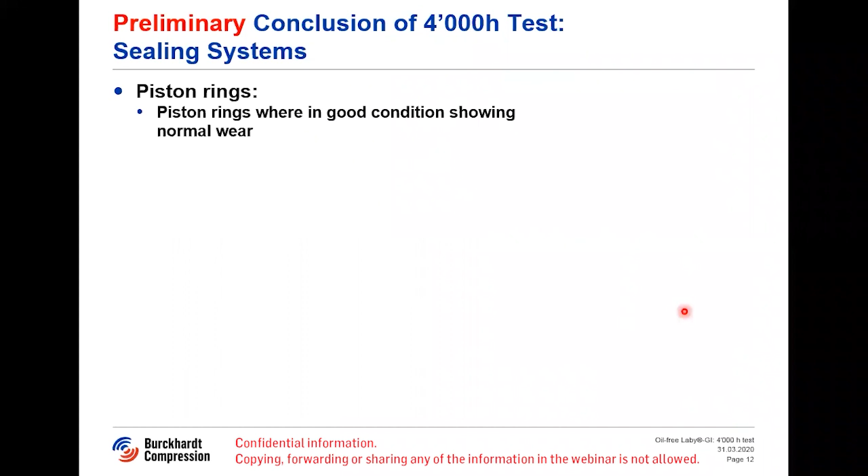So the preliminary conclusions of this 4,000-hour test: the piston rings were in very good condition. They showed normal wear. The packing has some potential for improvement, but despite the damage of some of the sealing rings, the MP rings were in very good condition.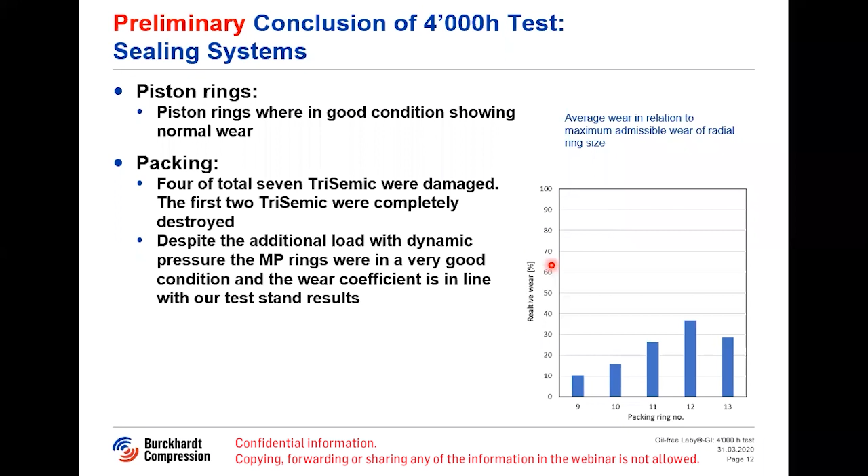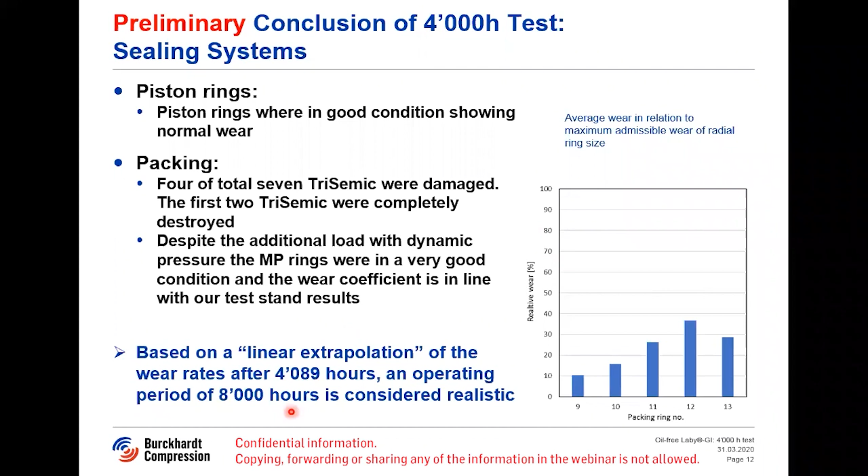If you look at the wear, here you can see the maximum allowable wear of these rings—these are the 5 MP rings—and how the wear was. In the worst case, they reached less than 40% of the allowable wear at 4,000 hours. This brings us to the conclusion that, with a linear extrapolation—which can be argued whether it's valid here or not—8,000 hours of operation would be realistic.

Now we'll highlight some of the differences between the system that we have just tested, and are still testing, compared to what we are offering for new vessels with our modified 5LP250V.

So this is the existing system. It's basically the lubricated system where we have just turned off the lubrication and improved a little bit the sealing rings. You see here the 5th stage compression chamber, 4th stage compression chamber, the piston with its piston rings, and the packing.

If you compare that to the new solution, where we have the 4th stage suction in the communicating chamber here, and then being compressed close to the packing, we compress from about 40 to more than 100 bar. And the 5th stage up here compresses from 100 to 140, up to 300 bar.

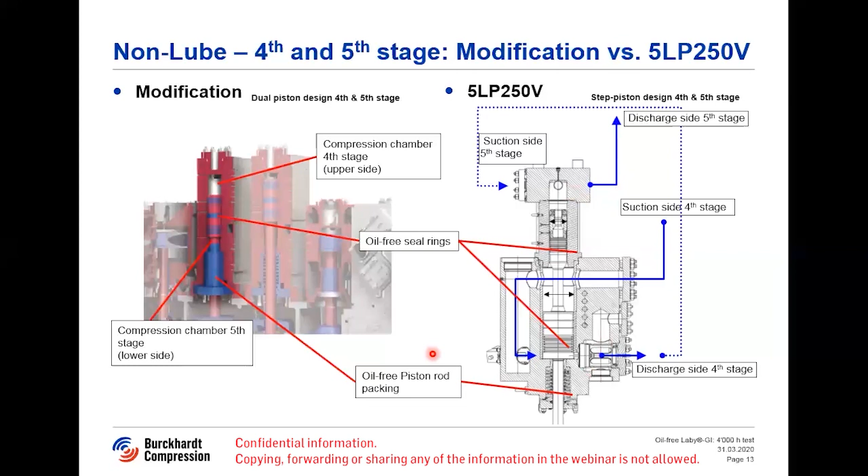The main difference is that here we have 100 bar static pressure on the packing, because the suction pressure of the 5th stage is about 100 bar, and additionally 200 bar dynamic pressure on the packing. While here we have about 40 bar static and less than 100 bar dynamic on the packing. So this reduces the load on the packing dramatically.

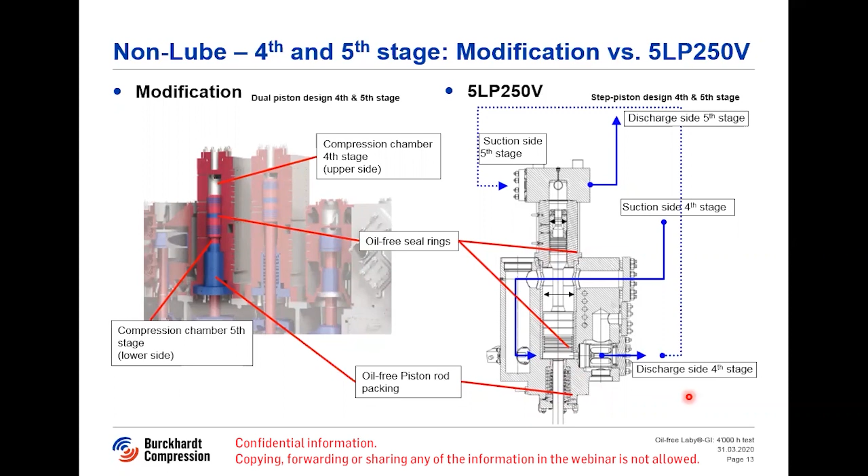Remembering the results of the test, the piston was no problem, but the packing is a real challenge. So I think this modification helps a lot to increase the lifetime of the sealing systems.

If we compare the main drivers for lifetime, this is of course differential pressure—both static and dynamic—and piston speed, because it's also very important. Speed doesn't have a linear effect: the higher the speed, the higher the temperature, and the higher the temperature, the lower the strength of these polymeric materials. That's why it's very important that we also look at the speed.

We compare here our test compressor—the modification of the existing lubricated machine, now non-lube—and our new step piston design. Our test compressor is operated with hydrogen, which is much more demanding in terms of leakage, allowing much less leakage before requiring the compressor to be stopped, and we have a lot of experience with this compressor.

Usually we don't run more than 2,000 hours with the same packing, but we can extrapolate because we have a lot of experience with this compressor. So we estimate that on our test compressor, our sealing systems for the piston and the packing would last more than 12,000 hours.

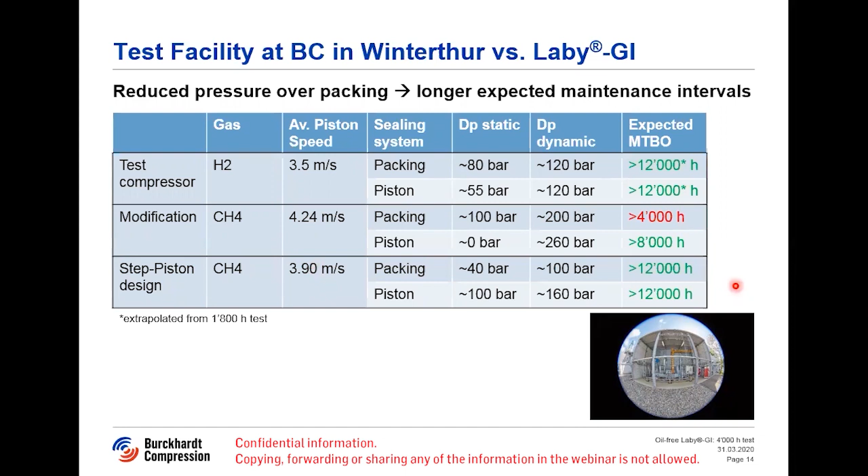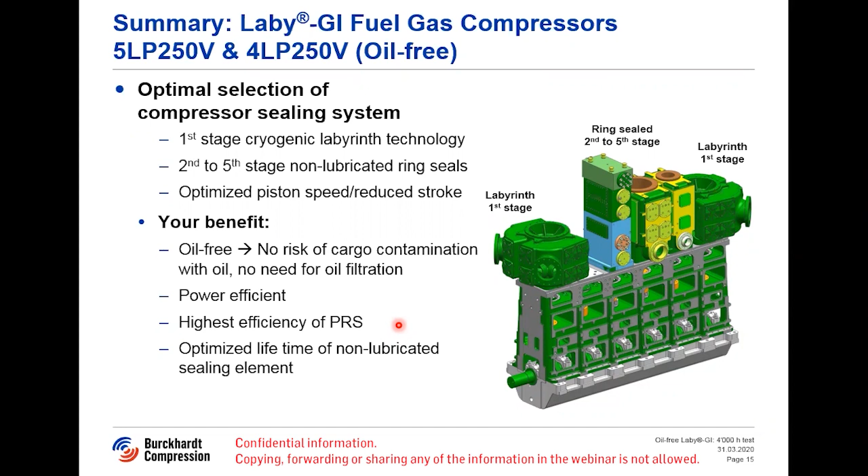So in total, this new compressor - Thomas already talked about it in more detail. I just wanted to highlight this new product again, because now having all the insights about the dry running technology, I think it's important to bring it back to your memories that we have this machine to offer, and it has a lot of benefits, mainly the oil-free operation, and also it's more power efficient, and the efficiency on the heat exchanger in general, but also of the PRS, will be increased. Altogether, we think it's really the solution for the future of ME-GI powered LNG carriers.

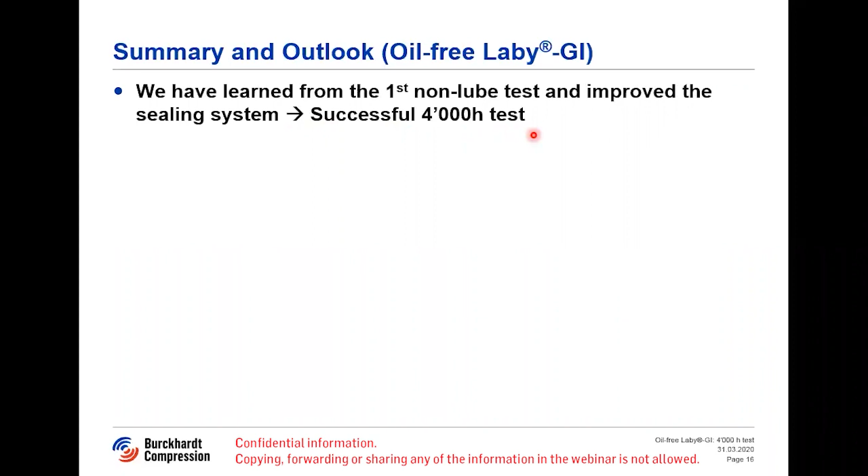I'm summing up. So we have learned from the first test - I think it's very good to see that this test, which caused a lot of troubles for the owner who was willing to cooperate with us, at least had a very good benefit for the whole industry. We are very grateful that we could test this system for the first time, even though it caused some problems, but we learned a lot, and that's very important. In the end, it led to the success we have now with this 4,000-hour test that we just concluded in February. We see potential for much more than these 4,000 hours. I think our next target is 8,000 hours. We will try to achieve that.

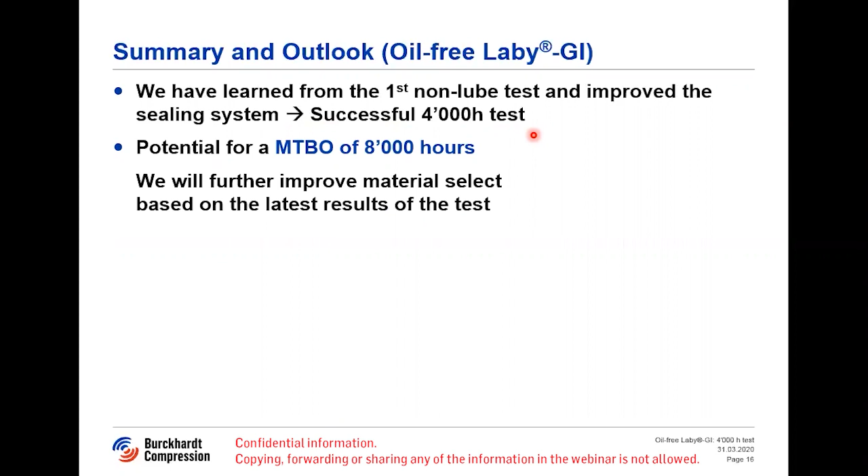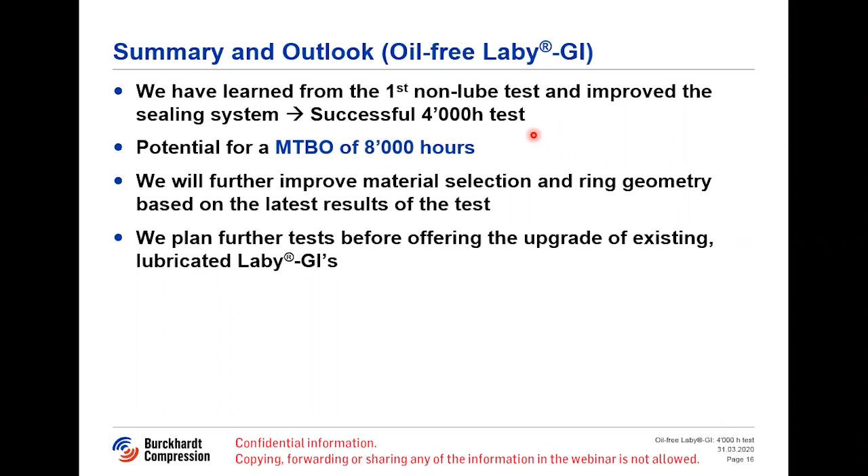Very importantly for us, especially for new compressors, the results of these 4,000-hour tests even underline our estimation for the new Mark III compressor, the 5LP250V, with a step piston design - that we can achieve a mean time between overhaul which is in accordance with market needs. Especially if we can facilitate the maintenance or replacement of the sealing systems, it's probably possible in one day during a ballast voyage. We believe that 8,000 or 12,000 hours of lifetime for the sealing system would be acceptable to you as an owner, and with this we could offer a very good solution for the market, for existing ships as well as new ones, for the next 20 years.

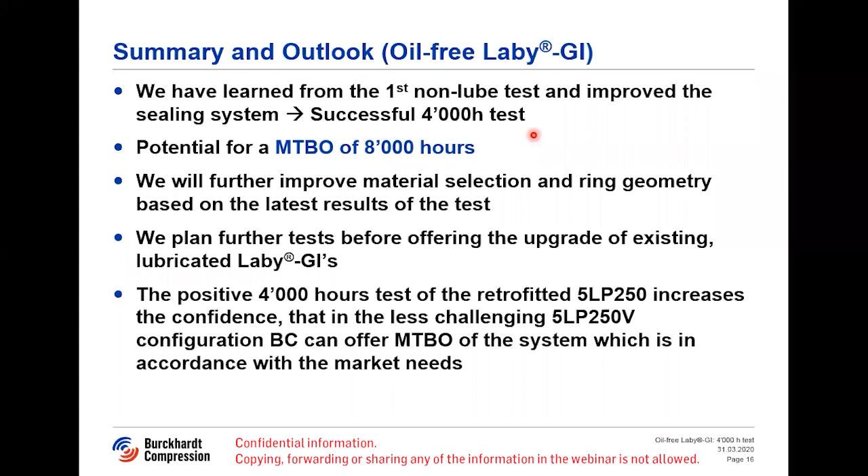So that was my summary of the results. If you have questions, I'm happy to answer those.

Yes, thank you for a very nice presentation. This is Peter Nierens from MAN Energy Solutions. I have a short question.

Do you consider that the demand for gas pre-filtration will be higher when running dry compared to, let's say, an oil-lubricated compressor? So do we need to consider better filtration of the gas, or can we continue with the present standard? I don't think this is required. Usually these dry running sealing systems can easily accept some particles, because the material we use can embed these particles, and it's usually less of a problem with a dry running system than with oil, where sometimes particles together with oil can accumulate and block the rings. With a dry system, the particles usually just go through, and since there isn't a lot of debris coming in, there won't be much debris going out either. So I don't think there's a problem with the dry running sealing system.

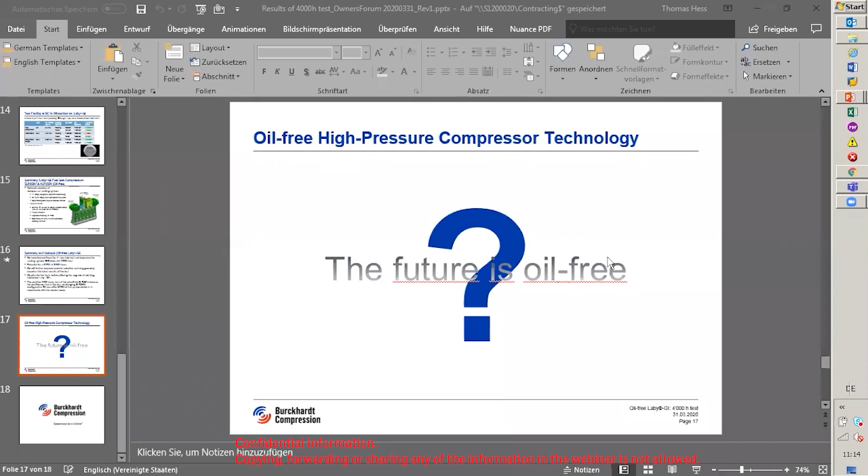We see there has been over time plenty of problems with oil and the gas ending up in the gas valve train filters, and that has been a very common problem on Rio and La Mancha, especially at higher engine loads. But this oil-free sealing for 4th and 5th stage piston, if that is implemented on this LP 190 compressor, is it expected to solve this problem with the oil particles flowing with the gas ending up in the gas valve train filter?

What we can say for sure is it will change it. Together with the oil, especially if it also heats up, this oil can form a paste which clogs the filters. With a dry running system, we might have some particles of wear, which usually have a completely different characteristic. We don't expect to have problems, but of course it's still a good idea to keep the filter at the gas valve train in the system.